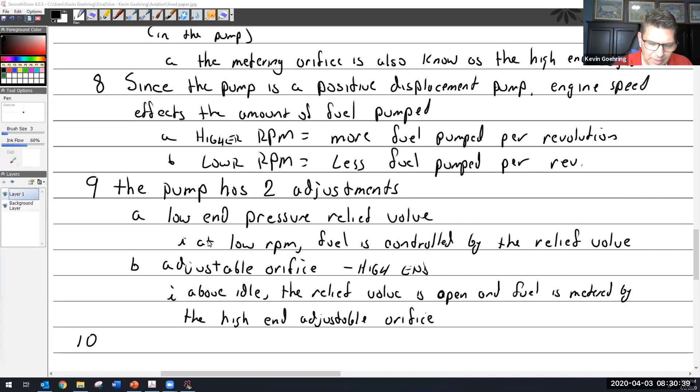So talking about the fuel pump on the Continental system. Point number 10: the pump provides more fuel than the engine needs, so a return line is necessary. So the pump provides more fuel than the engine can need.

Number one, it's recirculating inside of the pump system through the high-end metering orifice and the low-end bypass. Two, it's going to send it off to the fuel control unit where it also has more than it needs, so it sends it back to the pump through that return line.

Uh-oh, I deleted a point. Now I've got to remember to change everything. So, point 11: integral check valve. Integral check valve allows the boost pump to bypass the engine-driven pump.

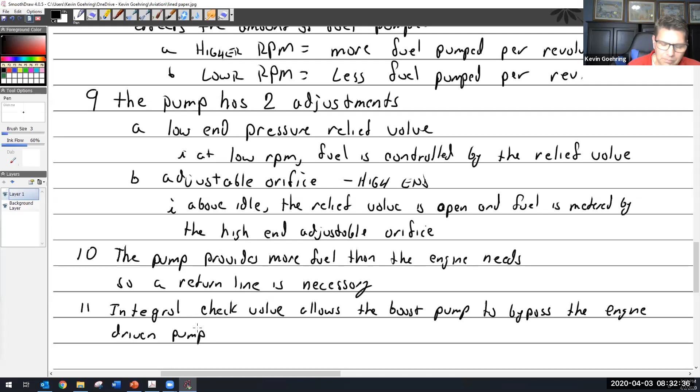And it does that for two reasons. One, for starting. And also in case of an engine pump failure.

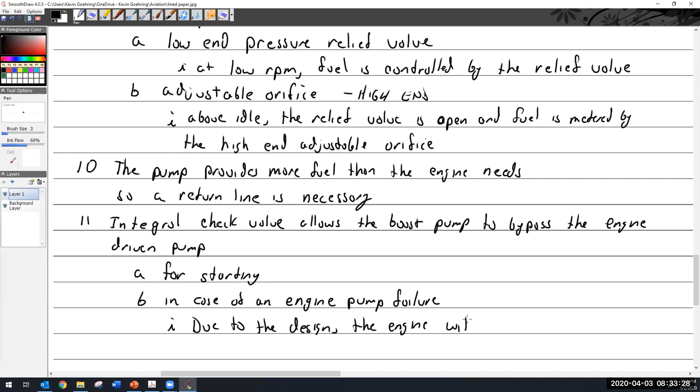And I believe I had mentioned this, but I'll write it down for you. Due to the design, the engine will only operate at about

Stephen, mute your mic. Sorry, what's going on? You're noisy. No, oh sorry, I didn't notice.

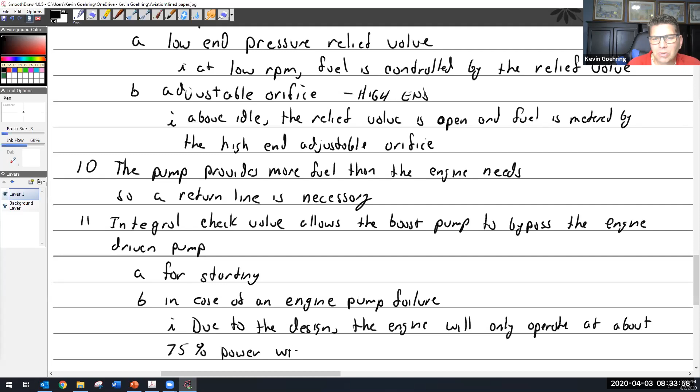There are also situations with this particular system where if you're running it, especially down at an idle, and you hit the boost pump on high, you're going to overpower the engine-driven pump and flood out the engine. It's going to run kind of crappy. So it kind of goes both ways there.

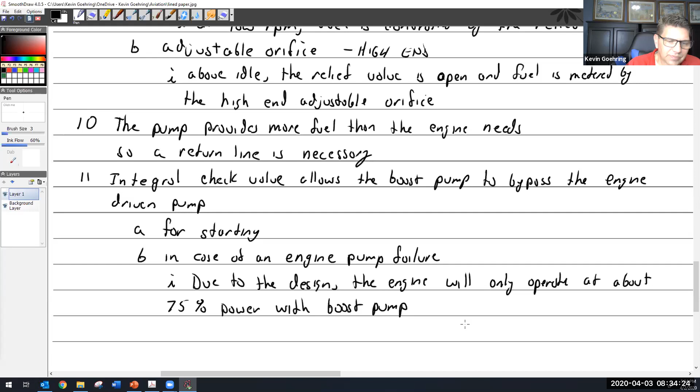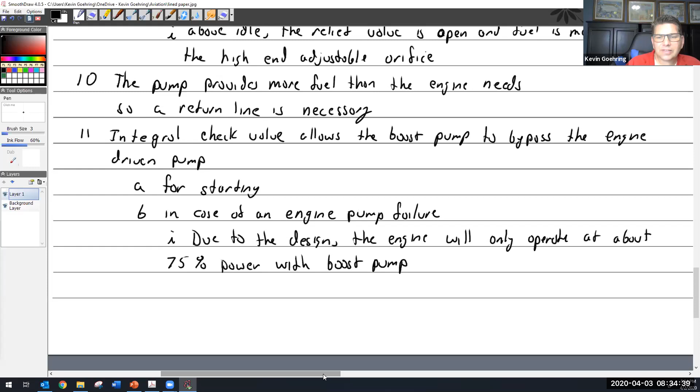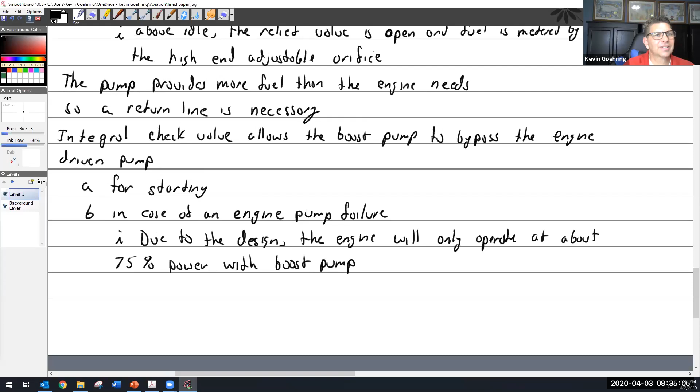All right, did I write slow enough? You guys are kind of going there? Yes, sir. All right, I'm going to slide it over. Anybody have a problem with that? One second. Wait one minute, I'm almost done. Okay, because MJ is telling me to speed up. See, right there in the notes: speed it up. I think that was from yesterday. Is it? I don't know. Maybe it was. Okay, sliding on over.

All right, let's talk about the fuel control unit. Actually, not the fuel control unit—we'll talk about, and I don't have my notes in here, for some reason I think it's just the way this book called it—the fuel air control unit.

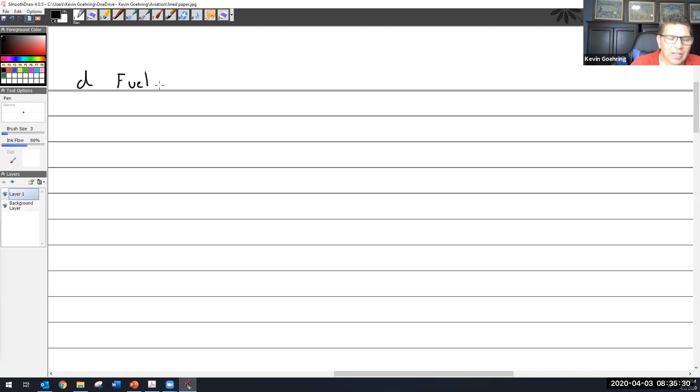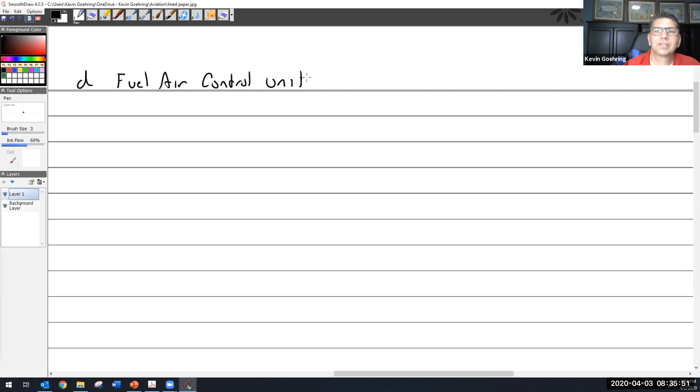Where the hell did you get D? Nobody really knows. Came from number 4. Oh, C was after the fuel injection pump. So we moved on to the next component, which I prefer to call the throttle body.

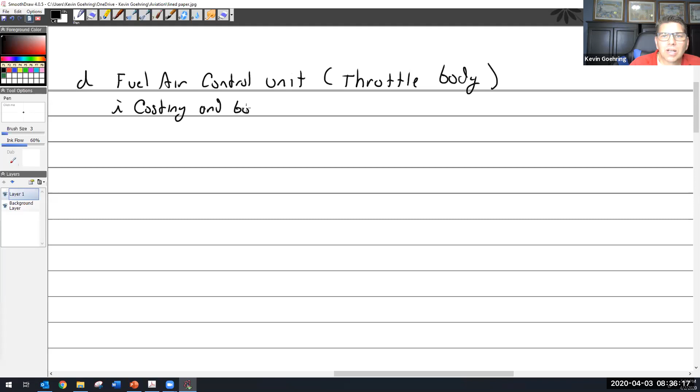The throttle body. All right, so the casting and bore size is matched to the engine size.

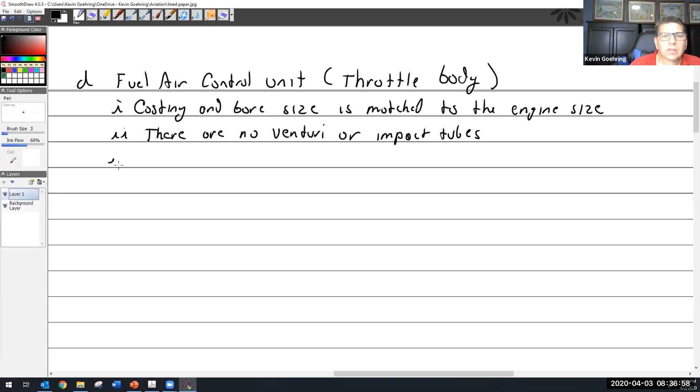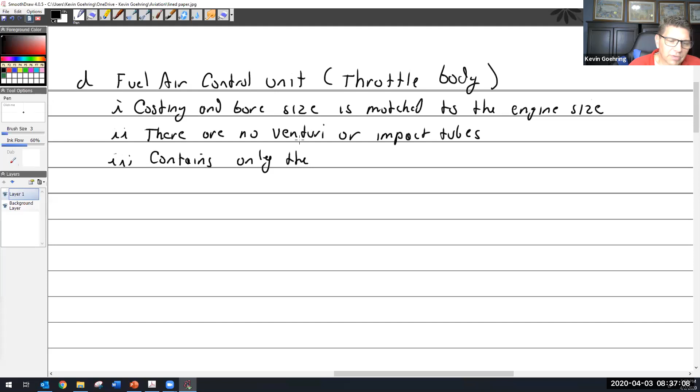There are no venturi or impact tubes. It contains only the throttle plate, an idle adjustment screw, and linkage to the fuel control unit.

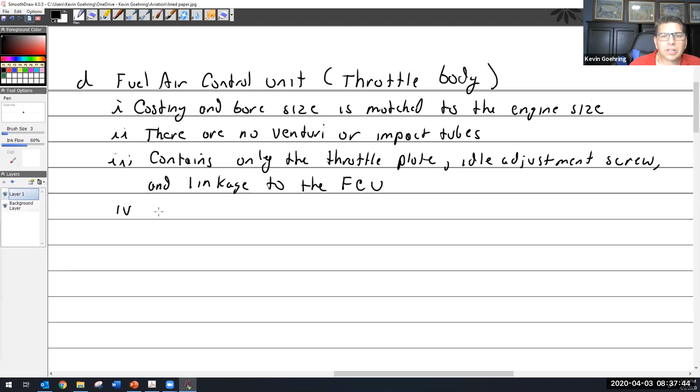I'm going to add a note here. Some styles do contain the—where do I want to give it—it's the final metering. So what would I call that? We'll give it a good name: the final metering orifice of the throttle shaft. That works for me anyway.

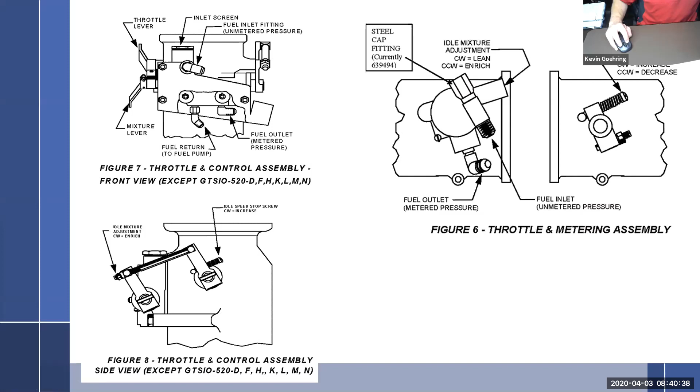So this is a style I was showing you here in the upper right. Sorry, I don't have a good picture. Hang on, I think I can find one. Please stand by.

Yeah, this picture works well enough. The other ones look just like this—it doesn't have the fuel control unit mounted or the final metering orifice, just this shaft and the idle speed screw. If I turned it around, you'd see nothing. Right here is the fuel control unit bolted on with the linkage that comes down and attaches to it, and this is the idle mixture adjustment. What you're doing is speed—just like everything else, it controls how far the butterfly valve closes, which restricts the air and therefore the speed.

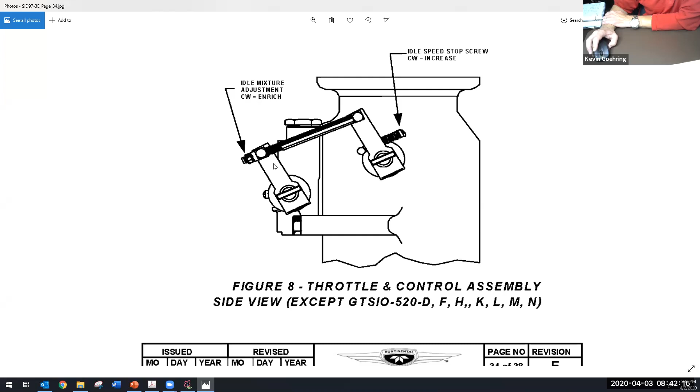This adjustment brings this arm either closer to or further away from the throttle arm. When I open the throttle, I move this lever and it moves with it, opening up the metering orifice down in here. But at idle, bringing this arm a little closer leans it up, and bringing it the other way richens it up. So you're just adjusting exactly how far away this arm is from that arm—that's how you adjust the idle mixture.

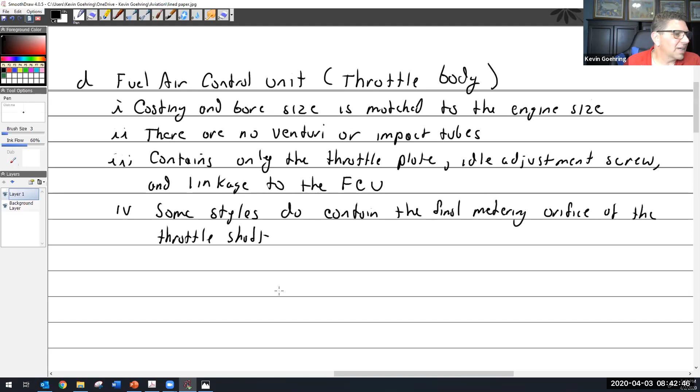Kevin asked if that arm is fully threaded or just has a little bit of thread. No, it's not fully threaded—you don't have to move it far, so it's got about an inch or so of threads. August had a question too, but somebody already answered it: the shaft.

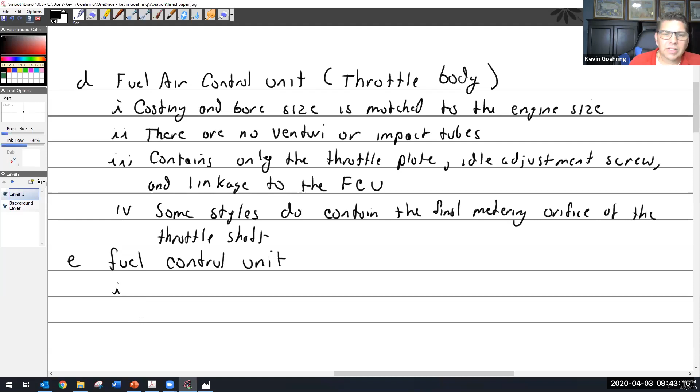So we're going to talk now about the fuel control unit—A, B, C, D, E, fuel control unit. This is the bigger engine style, I guess—I should have named them style A and style B. It is attached to the air unit, I'll say the throttle body, and connected to the throttle by direct linkage.

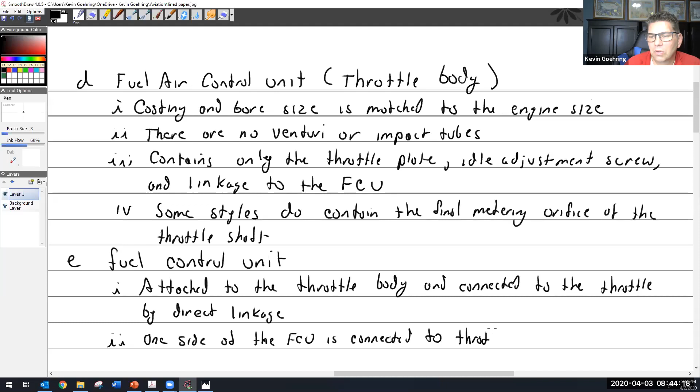One side of the FCU is connected to the throttle—more precisely, connected to the throttle by direct linkage, which is what I just talked about: attached to the throttle body, connected to the throttle by direct linkage. So one side of the FCU goes to that linkage right there. And the other side of the FCU is connected to the mixture—the mixture control in the cockpit.

Okay, so the center—what I'm going to write next is the center plug right here. It's actually taken out right over here. This center plug contains the fuel metering plug, but it actually contains the true metering orifice. So it connects to the metering orifice, a return line, and the secret little check valve that's in there. There's a lot going on with that little plug.

I know, maybe now's a good time to take one apart and look at it. Give your fingers a break.

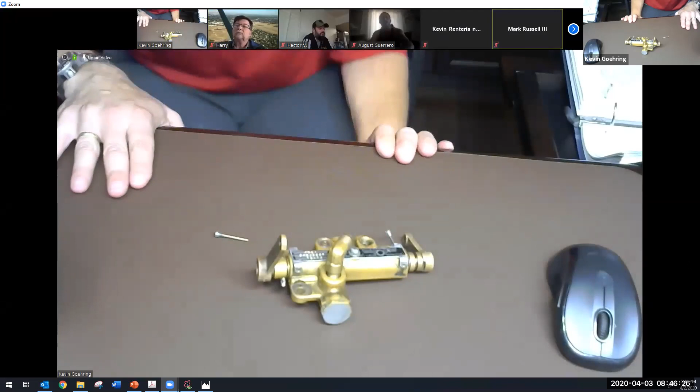Bring it down here, make a clean spot. Okay, little MJ sounds like he's going hard on the video games out there. He is actually—it's amazing to watch him. He literally stands and jumps and hops the whole time he plays. He'll do it for hours and hours, and it's insane.

All right, so this little thing here has pins that go in, and I took them out. I'm not going to put them back in because it's really difficult to get them in, and I thought, why waste my time doing it? So, fuel comes into here and goes into the screen—this is a screen you should check every 100 hours, at the annual inspection.

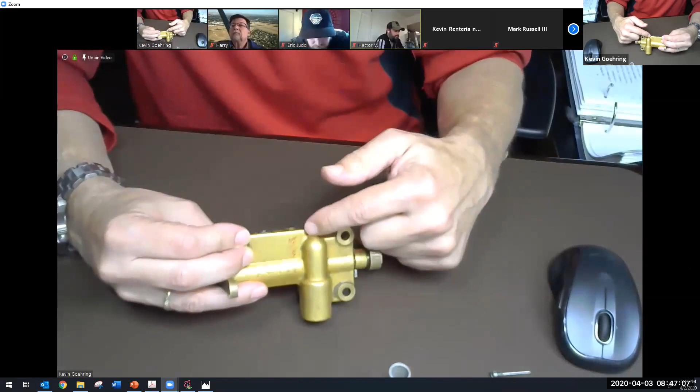Fuel comes in through here and goes around this way, making a little cavity where fuel comes in. This side is the mixture side, because it comes in and the first thing it's going to hit is the mixture side. So I'm going to pull this out—there's my mixture side. I don't know, can you guys see that okay? It does not look very clear on my end. Could be worse, could be better too—maybe just too much light, I don't know.

Looks fine to me. What's that? It looks fine to me. Does it? Same on my end. All right, then I won't worry about it. I was going to try and adjust it, but okay.

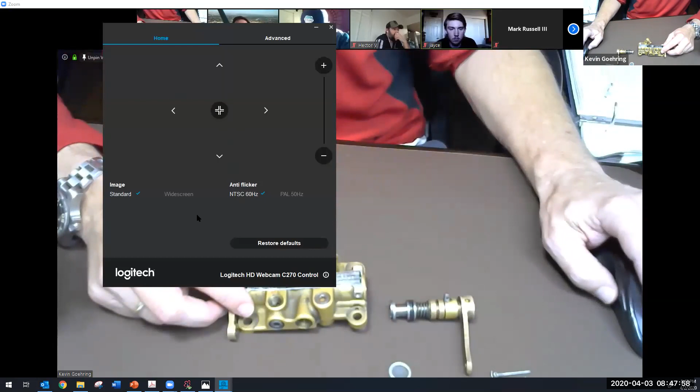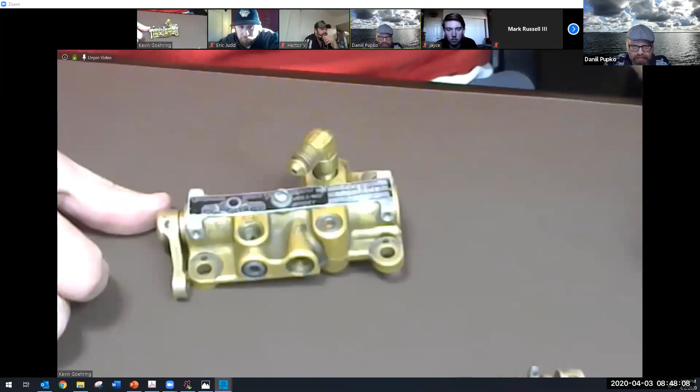So, because I have very little detail here, I could zoom in. Let me see. Ooh, is that good or bad? Bad or good, it's better. There, all right, and then let me see, advanced.

Ooh, that was not good. Whoa. Okay, I'll leave it like that. If I look at it too much, it's weird.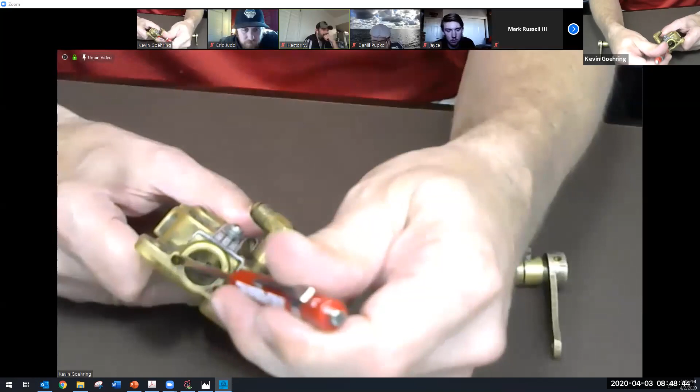Okay, so fuel comes in, and then inside of here, can't really see, but there you can. Down in there, maybe there's like a little cavity down here, which is made up by this. So it's a little cavity. So fuel is going to enter this right here, and fuel is going to surround that.

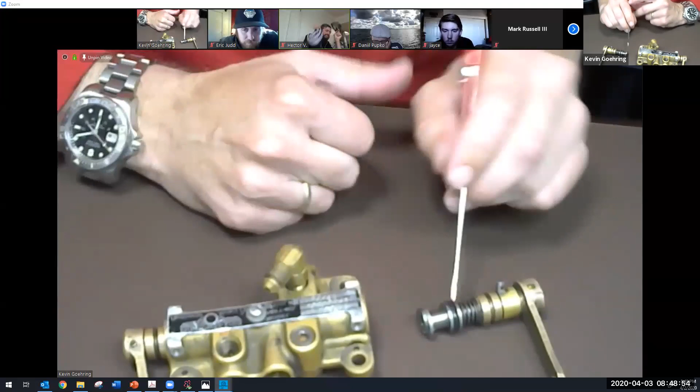And then there is a little orifice, right? The bigger one, so you want the bigger one. The bottom one's that secret passage. So we have this orifice right here. Fuel comes in here, and it goes through there and out this orifice. And then where it's going to go to...

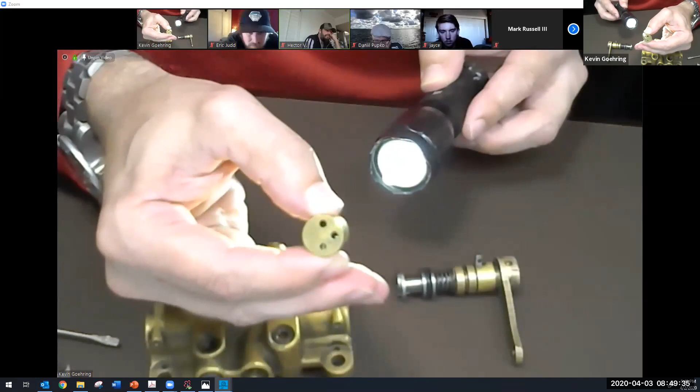And you should never use steel instruments because this is all brass, but all right, there's that little plug that's in there. So I'm going to pull the plug out, and I'm going to let you guys look at it. We have 3 orifices, and flashlight. You can see that, well, one of them goes through and the others do not.

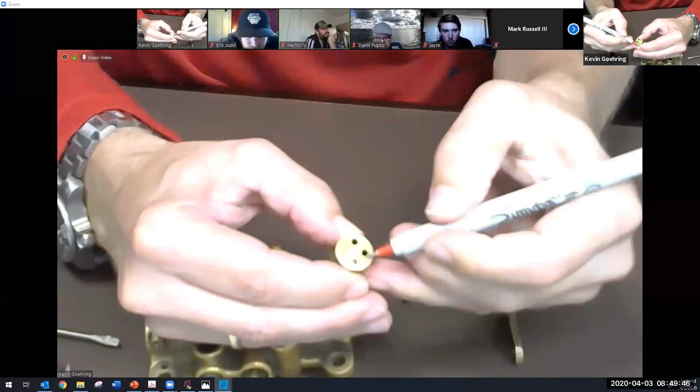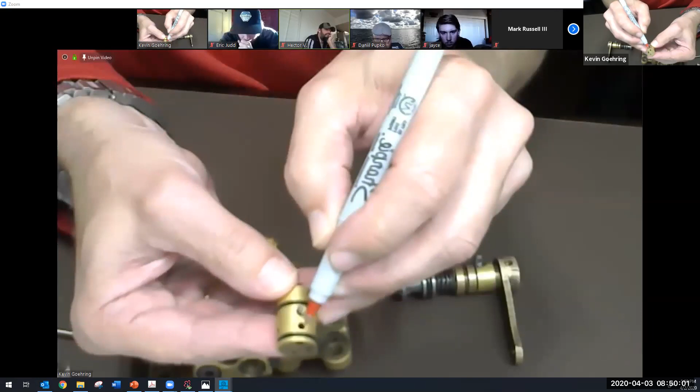This one right here is the main metering orifice. So this one goes all the way through, straight shot, no restriction. This one here is the secret passage that has a check valve in it. And this one here is lined up with this up here, so it goes through and goes up to that one and out. Because if I turn it around, you only have 2: the main metering orifice that went all the way through, and the secret passageway with the check valve.

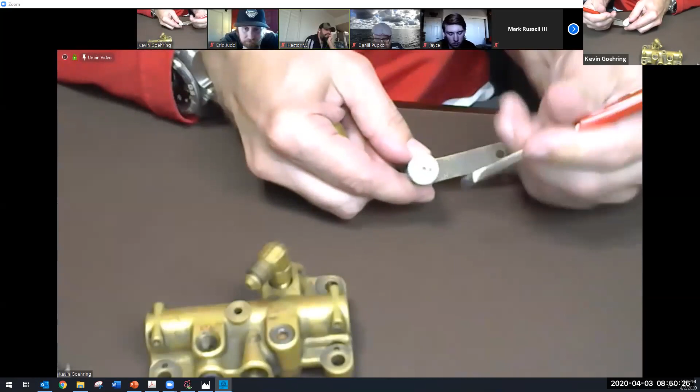So, all right, so what I've got then is this lines up with that. And because it's got an eccentric—I know there's a lot of glare on there, so it's hard to see—this is very eccentric, meaning it's not perfectly round. So it's going to go over this right here, and at some points, it's going to partially block the passage going directly through, and start opening up the passage that goes up here.

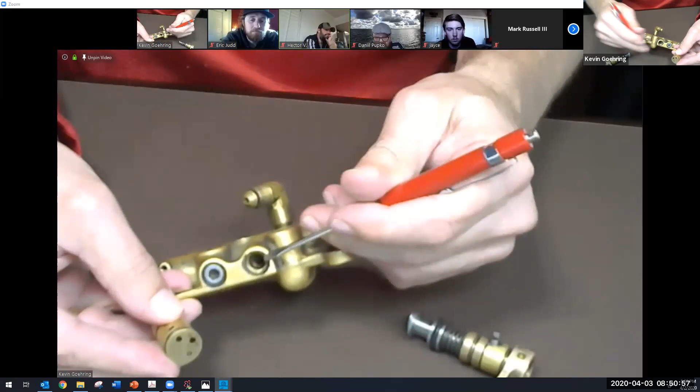So as it opens up this one and goes all the way through, I'm at full rich. As I go off of full rich, it's going to start letting more fuel go up here, which goes up to here, which comes out of here and goes back to the inlet side of the pump. So that's how that's going to work.

It's similar to the mixture control on the float type. Yeah, pretty much, I can see how that would work. The only difference is this type provides a return path, so it gives it 2 ways to go. And in the float type carburetor, it only gives it 1 way to go—it's just a valve that shuts off or lets more go.

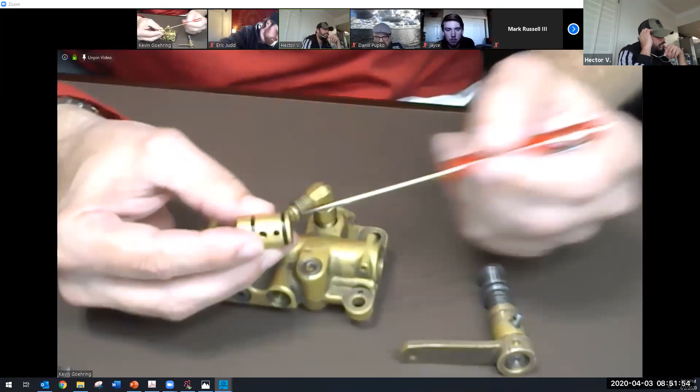But this one, because it's coming in here, lines up with, again, the main metering orifice hole, and at full rich, it's going to shoot it straight through, no restriction. And as I start rotating it, it's going to start blocking off a little bit of the main one and start opening up this one over here, which lets fuel go back here to the inlet side of the pump. So fuel that goes all the way through at full rich just comes out of this side, and it does almost the exact same thing that it did on this side, just on this side.

So it's got an eccentric piece, except for the little hole right there. And this eccentric piece right here is going to either open up this hole all the way or close this hole off almost all the way. So at idle... full rich, this side says, go ahead, fuel, go all the way through.

Remember, the engine's not turning fast anyway, so you're running off of the back end pump. We have the low end relief valve open. It's not a lot of fuel coming through, but it gets to the mixture, and the pilot says, no, just go ahead and be full rich. So this is full rich, sends all the fuel through this little orifice.

All the fuel comes to this orifice, and this is calibrated to hold that orifice pretty dang tight. It's not open very much at all. So this brings the final metering jet all the way down to a very tiny size. Fuel then comes into this area, and it goes out to the fuel manifold or distributor valve.

So we increase the throttle, and as I increase the throttle, remember this thing is literally tied with the rod to the throttle valve. So I open the throttle valve, and this opens up, and that just opens the orifice more and lets more fuel come out of here.

So I'm running at wide open throttle, flying along at cruise or whatever, and the pilot says, well, I'm gonna lean it out a little bit. So this is attached to the red knob in the cockpit, and you just pull on it to lean it a little bit more — I'm not sure if it's pull or push at this point. But I rotate it a little bit to the lean position.

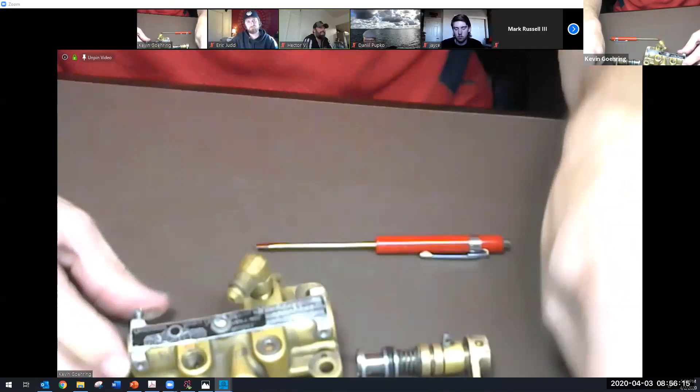Do you want to see how the other one works since we're on the subject? Yeah, yeah, like sure, keep him busy.

Okay, so this type goes with the style that does not have the mixture control back here. So that right there is a low end. That's all that is — no mixture control.

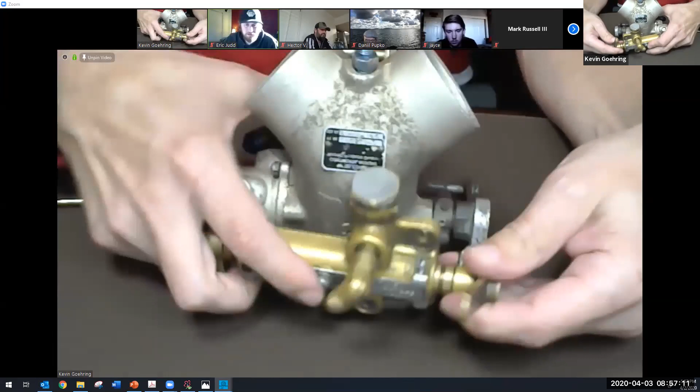All right, but this style that has this attached to the throttle body, that does not have the linkage. I told you there's linkage that connects to it, well, it doesn't. So right here, this linkage goes right to the red knob in the cockpit. Doesn't touch anything else but this. This moves here and stuff happens inside of here, as where the other one would be attached kind of like this.

And then these two are linked together, and that's what that looks like. But when I add this, then that changes everything. That means that I need this fuel pump that has this adjustment on the back. So that right there, you know what it is. That's the low end adjustment, high end adjustment, no touchy. This right here is the mixture control. It goes to the cockpit, and the pump works exactly the same, except the screws are tight.

Except the mixture is built into the back of this, is where on this one, the mixture is built into here. So here's my mixture on this one. There's the mixture on this one right here. Let me get that out.

So what happens is, you can see here's the outlet for the fuel. So instead of having the outlet anywhere near the pump body, it pumps it backwards through here, and the outlet becomes... oh, I broke it. The outlet is right here. So there's a very small hole up here that is the outlet.

And that lines up with this shaft with these holes. So it starts out where this is kind of flush, and then it starts to get more cut out, more cut out, more cut out, and then it's flush back on this side.

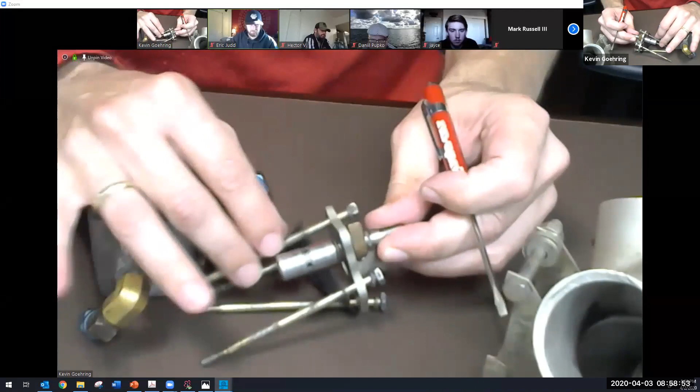And so it's kind of hard to line up with the camera and show you, but basically what happens is at one spot at full rich, fuel is going to come in through here and then fill this chamber and then go out the bottom. And so that's full rich. And then as I go to lean, what's going to happen is I'm going to start plugging up the holes so less comes through here and to the outlet and out.

There's also the secret little check ball. I don't know if you can see it. It's very, very tiny right there. The secret little check ball. And sure enough, when you line up, let me see, do I have the check ball? No, there's the check ball. There, one's a pin to hold it. There's a little check ball, and it does the same thing.

When I have it in idle cutoff, this check ball goes straight down to the outlet here and allows fuel to come up through here backwards into the little hole, through the check ball, inside of here, out one of these holes and back up into the pump. So they kept the check ball theory going.

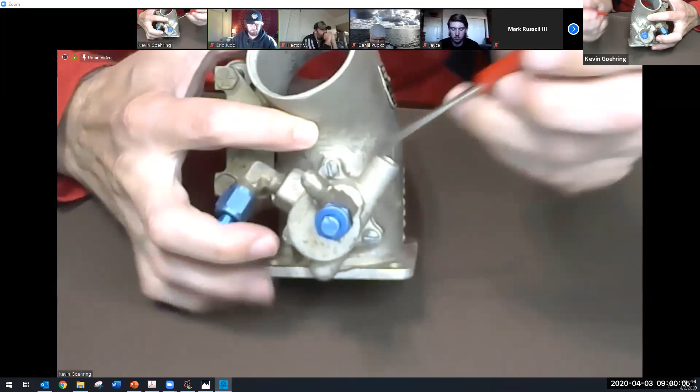So that's my mixture, right? So it just controls the size of the orifice of how much is leaving the pump to go off to the rest of the fuel control. So this has got a fuel control unit several feet apart. But this right here then, remember if we had this one here, we had an orifice, main metering jet, and then something that controlled the orifice size on one side and something that controlled the orifice size on the other side. Doing the same thing. It's just several feet apart.

So this right here is attached directly to the throttle for a reason.

Somebody's gonna have to come over here and put all this stuff together. That's what your daughter's for. I just put it in a box and hand it to her. Hey, I'm not sure which went to which anymore. Could you just put all this together?

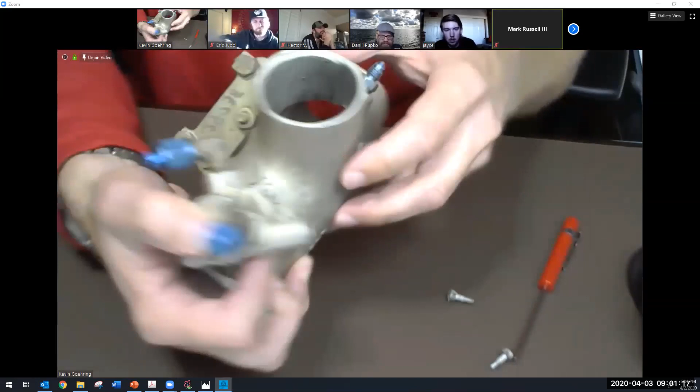All right, so this is under spring pressure. All right, right there, that screw. What is that screw for? Mixture adjustment. Yes, idle mixture. That screw right there is for idle speed. Okay, I'm gonna try and take this apart here so you can see.

There we go. Okay, this is kind of a difficult concept, but well, I'll do that later. So basically what you have is, still feel like that's, I don't know how you can see it, it's such a glare. So this brass part is actually held stationary, and it has this little orifice right there. And so fuel is going to come in, let's see, fuel is going to come in here and fill this up, go through this orifice, and then behind here is another eccentric plate.

So it's really the exact same thing as this throttle valve, but just huge. This is like the main metering orifice right there, that little hole that we saw in the plug over there. So that's it. And it stays put, it doesn't move.

And then when I move the throttle, it moves this right here. And because it's eccentric, it's either blocking this little hole or uncovering the hole. So at idle, it's going to cover it almost all the way, and then at full throttle, it's going to open it up. So it's just moving it back and forth.

And then it goes into here, and that allows it to come out of here and then off to the fuel manifold, or what was I calling it, the other one, distributor valve.

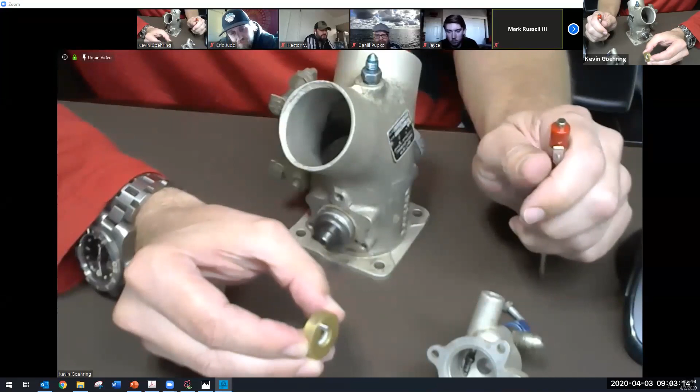And so if I tighten the screw down, it rotates it this way, and if I loosen it, it rotates this way. So what it does is it fine tunes exactly where that little orifice is. So if I set this at idle and I think, well, that's still a little bit rich, by turning the screw, I move this ever so slightly and leans it out, or the other way, and it makes it just a little bit richer.

So that's why that's got the pin, but it's allowed to rotate with the screw and holds it still.

It's the same test to check the mixture. Put it in idle, pull the idle mixture back. If you don't get a rise, then you're running too lean, so I got to richen it up. So I just turn a little screw to richen it up, and that moves this a little bit, and it changes the relationship between the eccentric and the orifice, and opens the orifice just a little bit more. If I want it to go rich, close a little bit. If I want it to go lean...

The hardest part about this is getting it back in, because it actually can go one of three ways, but actually one of two ways. But I can save that for another time. I'll just put it like that.

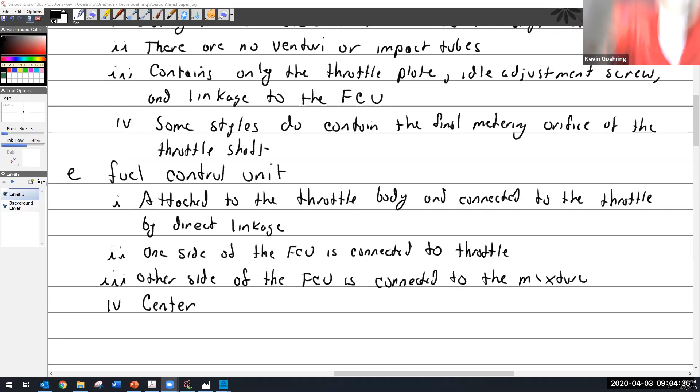And my video knew to just jump over just like that. How did it know? Seems like any sort of vibration does that. Let me share—smart camera. I guess it is, yeah. Oh wait, we got to do this, we got to zoom back out, we don't want that thing zooming in.

All right, what are we doing? 6:04, all right.

Fuel control unit attached to the throttle body, connect to the throttle. Okay, we got there's something about center. What was I about center? The center, it's where it contains the nougat, I guess. Center contains a fixed metering plug.

All right, one chamber. One chamber, I'll put this on the mixture, connects with fuel return.

And not sure I like what I wrote here. One chamber connects mixture control valve to metering valve. No, I don't like that. Center, maybe I'll just leave it like that.

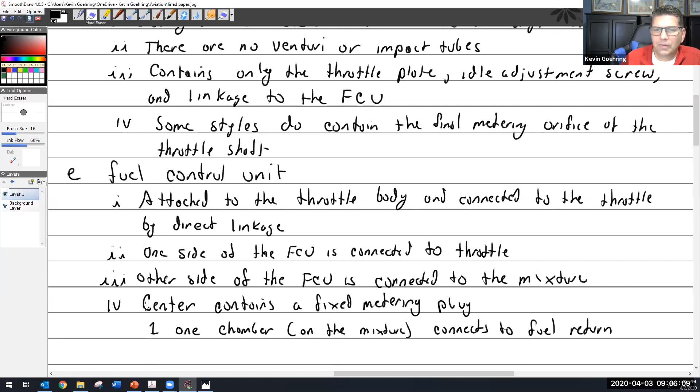Center contains a fixed metering plug, one, or I could say one passage, if we're talking about that would work. So I'm talking about the metering plug. We say we're just talking about the metering plug, then the metering plug, I could say one passage.

One passage connects to the fuel return, and another passage is the, we'll call it, main metering orifice.

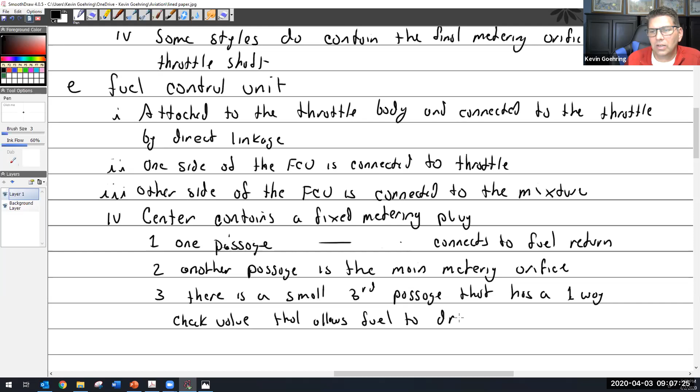And then I'll say there is a third passage, a small third passage that has a one-way check valve, a check valve that allows fuel to drain from the manifold valve.

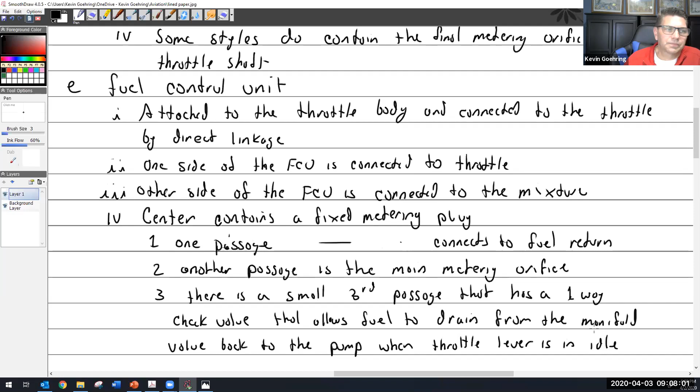Manifold valve, that's also distributor valve, from the manifold valve back to the pump when throttle lever is in idle and mixture is in ICO. You have to have both of those conditions to line up those little tiny holes. If you don't have those conditions, then that check valve isn't really going to do anything for you.

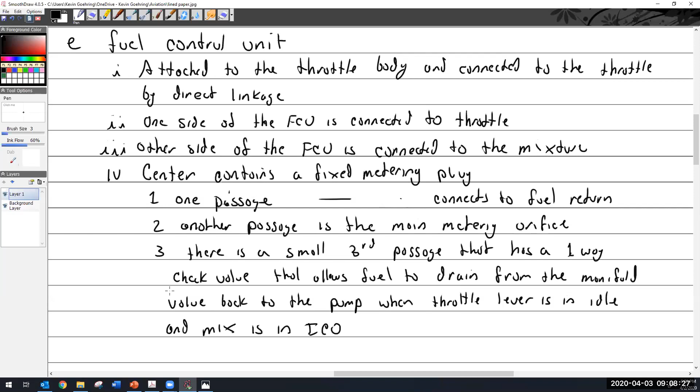And what was the point of it draining back again? It relieves the pressure on the manifold valve, which is actually held open by fuel pressure and a diaphragm and a spring. And so if you don't bleed off that pressure, it's going to hold the manifold valve open, which then allows fuel to be sucked into the engine still while it's trying to, what should be shutting down, and it won't.

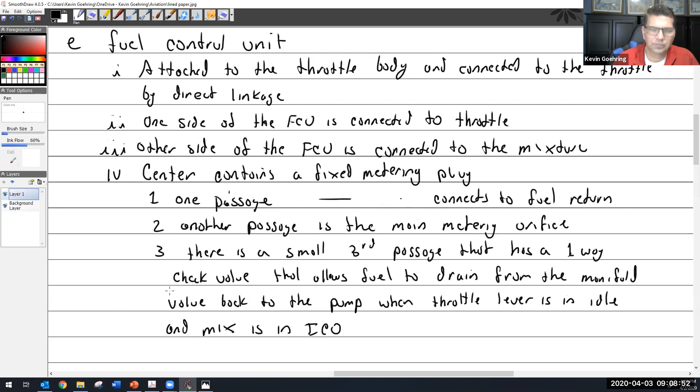All right, that makes sense. That's the center there. So now we can talk about the not centers, and what's happening. So fuel enters.

Did that make sense to you, Mark, what I said? Yeah, that makes a lot of sense, actually. Okay, good. Fuel enters inlet, passes through a screen, to the mixture control.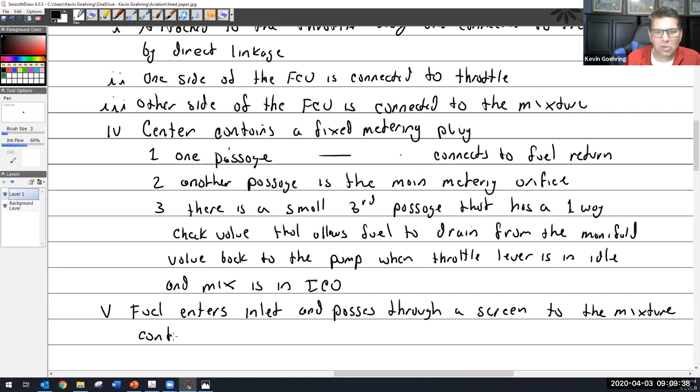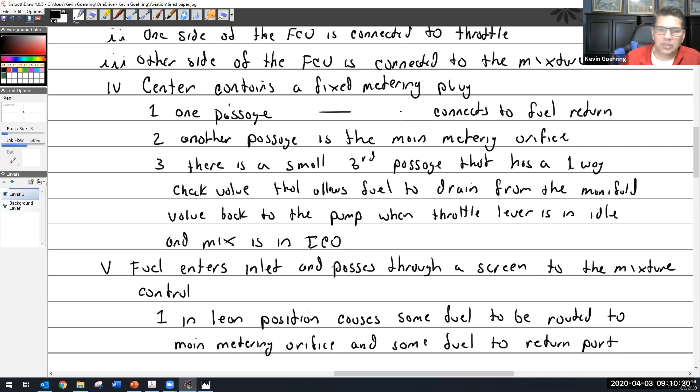So in the lean position, it causes some fuel to be routed to the main metering orifice, and some fuel to the return port. So yeah, you got a split, and depending on how lean or how rich it is, it depends on how much is going over towards the return line and how much is going off through the metering orifice over to the throttle side.

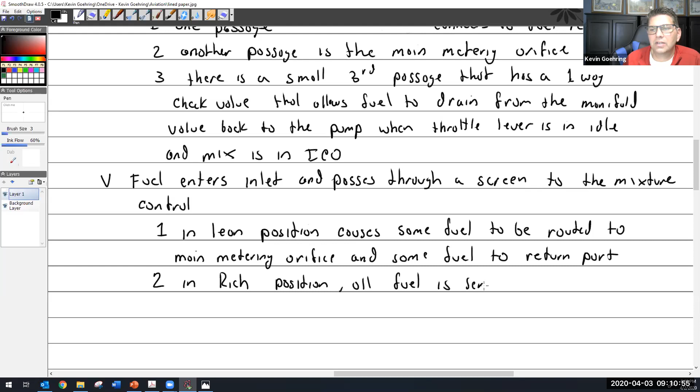We'll put it in rich position. All fuel is sent to the metering orifice. All right, so that's the mixture side. So then it goes through the center, which we already talked about, and then it's going to hit the throttle side. So then the throttle side.

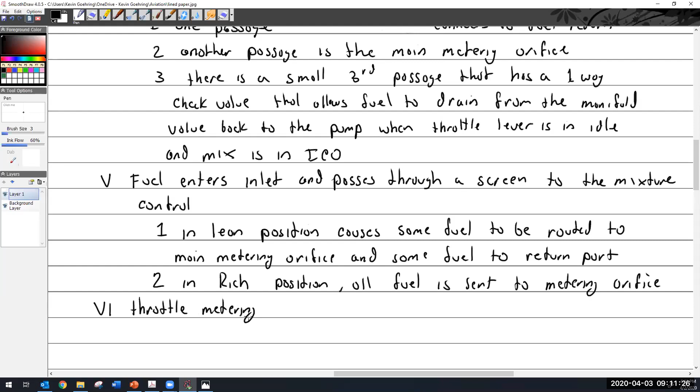When you say return port, you do mean the fuel tank, right? No, not the fuel tank, back to the pump. Remember, the pump has five hose connections: drain, fuel inlet, fuel return. Let's try again. Drain, fuel inlet from the tank, fuel inlet from the fuel control unit, vapor vent overboard, and what am I missing here? The outlet to the fuel control unit. Oh, out to the fuel control unit. Yes, out. Did I miss that one?

You got to get there before you can go back. No, no. So all right, well here we go. So five: one, drain; two, pump inlet; three, fuel pump outlet; four, vapor return; and five, other inlet that's being hidden.

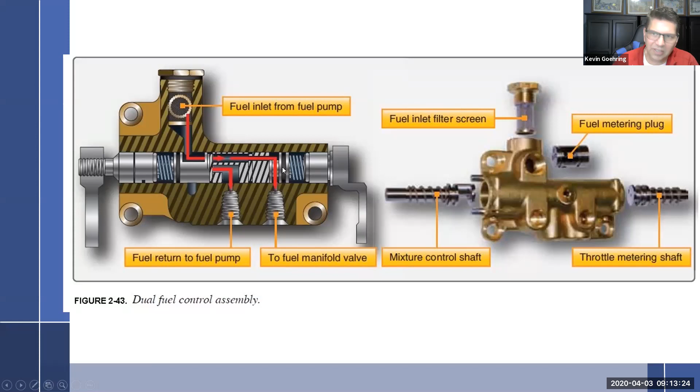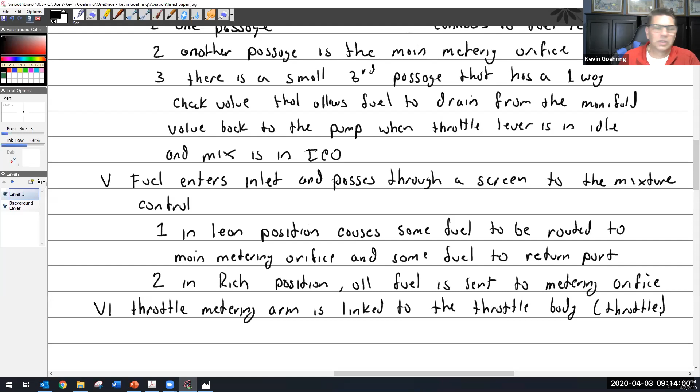And now we're going to talk about this side, which is the, I said something else, the throttle metering. I'm going to call that the throttle metering linkage arm, that's what I wanted to call it. See, I'm making it up as I go. The throttle metering arm is linked to the throttle body. So it's linked directly to the throttle body's throttle arm.

And it also has a metering effect, so it has, what am I saying, metering, the metering valve, which I call the throttle metering arm. So it's at the end of it.

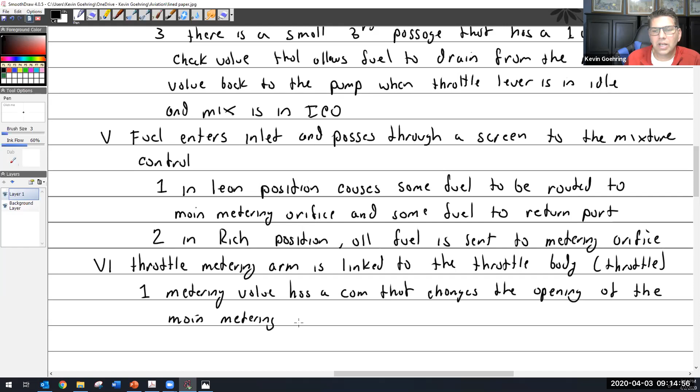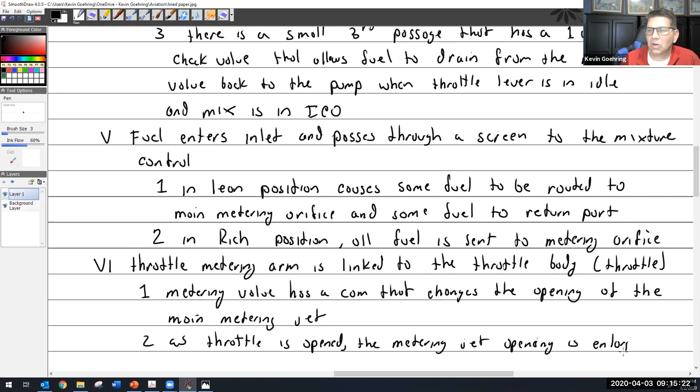The throttle metering valve has a cam that changes the opening of the main metering jet. There we go. As throttle is opened, the metering jet opening is enlarged, allowing more fuel to flow. And the opposite is true - as we close it, less fuel will flow.

All right, what kind of questions do you guys have about this? Does it make sense? Are you seeing how it works? Do you have the picture? There's a lot of components here, but it's really not, there's no magic to it.

What about an automatic mixture control? Yeah, don't have one.

Earlier on, when you had the main metering jet with the two ends where it has the three holes where they connect, where the fuel goes in and back out - what I was confused about was you said one of them's a return where it goes back out the opposite direction than the other two. So they open on... let me show you my camera. When one goes like this and the other goes like that, do they line up in sync? When you have the rod opening, are you saying the third passage with the check valve? Yeah, it's only lined up under one scenario.

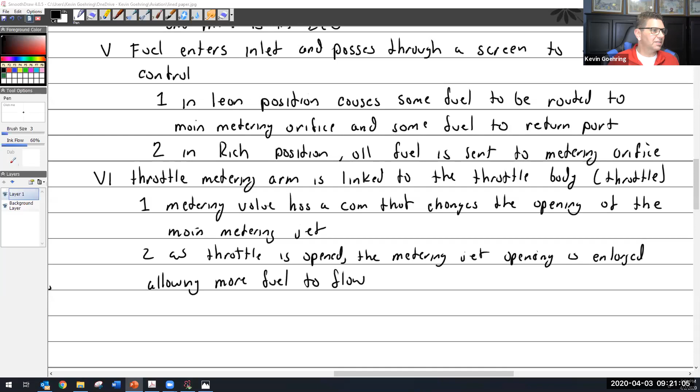No touchy, no touchy. When you touch those, then it's bad.